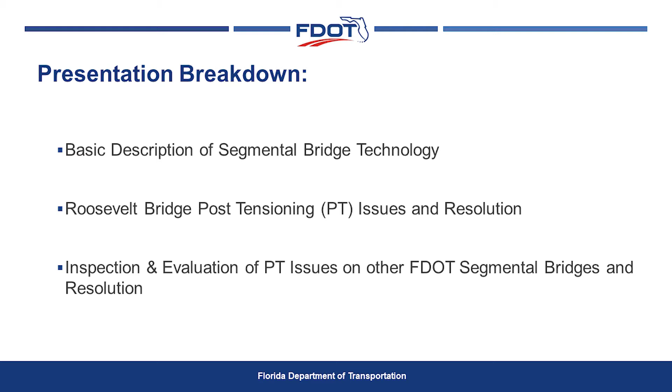This presentation is broken down into 3 parts. I'm going to give a basic description of segmental bridge technology, because I know some people here know what a segmental bridge is, but I want to focus in a little bit so we can understand better what we're dealing with. The second part is the Roosevelt Bridge case study, which kind of launched the last part, which is inspection and evaluation of PT issues on other segmental bridges and the resolution of those issues in Florida.

So there are basically 2 types of segmental bridges: span by span, which I'll touch on in a minute, and balanced cantilever construction, which we're going to be focusing on today. It is exactly what it sounds like - you hang a segment on one side of the pier, and you go on the other side, keeping the load balanced until you get to the closure pours. Then you close the closure pour, pour the concrete, and post-tension across the bottom of it.

Why this has been a popular erection technique is because it's self-supporting. The PT at the top is about 2.5 times what you need in the final condition. It has some advantages in terms of cost over span by span, which you'll see why when I get to that - just a brief touch on it.

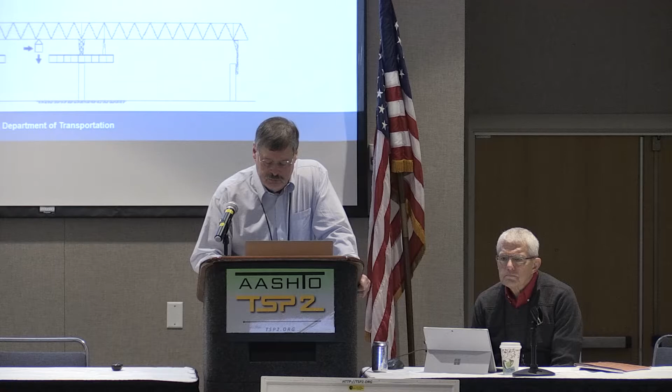So here is a typical balanced cantilever segment. They're cast in a casting yard, cast against the previously cast segment. The previously cast segment is rotated to adjust for horizontal geometry, vertical geometry, profile, deflection, anticipated deflection, shrinkage, creep - whatever else goes into that. Then it's moved up and they cast the next one.

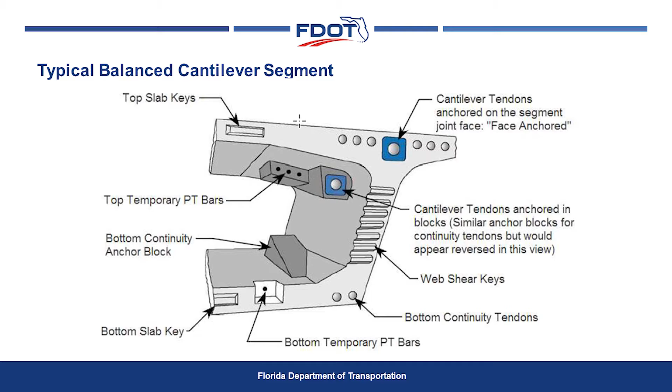What you see here is that for a balanced cantilever segmental bridge, they have internal tendons - internal to the concrete, and that's part of the issue we're going to be talking about. Also you notice the top temporary PT bars - that's called a blister. And on the bottom, they're showing bottom temporary PT bars embedded in the deck slab. It could be either deck slab. Typically blisters are used, and the only other thing of interest here is the anchorages, and that's a big interest.

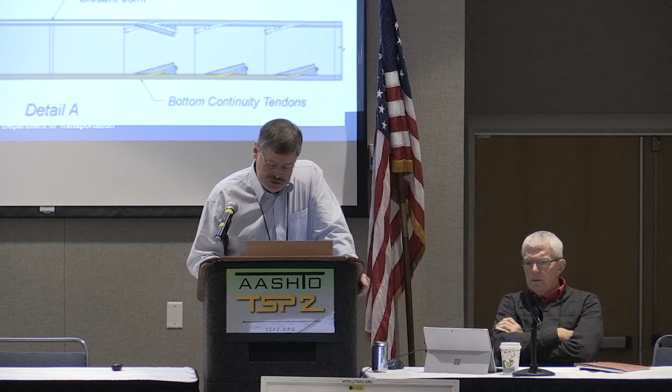I'm not going to dwell on this slide. It just shows that the way it's post-tensioned, it looks a lot like you'd have for reinforcing, if you were doing any other traditional, even smaller reinforced concrete bridge. It's the same thing - you got positive moment tendons, you got negative moment tendons. The positive moment tendons are actually called continuity tendons in this technology.

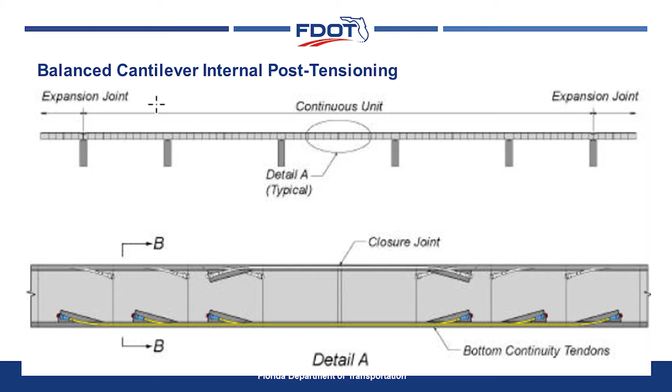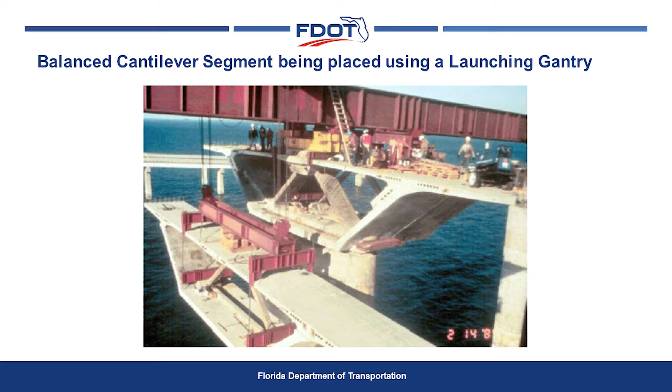This is a segment being placed using a launching gantry. This is very popular in Florida because a lot of it's done over water. You bring it out on a barge, you hoist it up, you put in your temporary PT, double face epoxy, you squeeze it, so theoretically you don't get any leakage - and it's not for the faint of heart. Believe me, I've been out there doing these operations, I've been on the stressing platform, and it has your attention, big time.

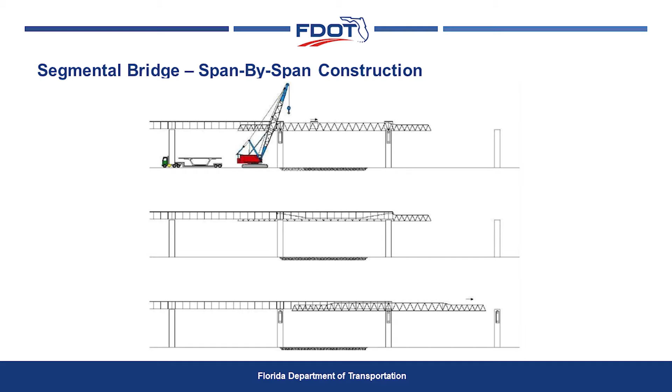Segmental span-by-span construction is similar, except it's used on a truss, and I think that's probably why it's a little less popular, because the costs are maybe a little bit higher. But sometimes there are good places to use these too. You have to have 2 spans erected so you can do the negative post-tensioning across the top, and we have quite a few of these in Florida. The big difference on the older bridges - well, first of all, they all have external tendons.

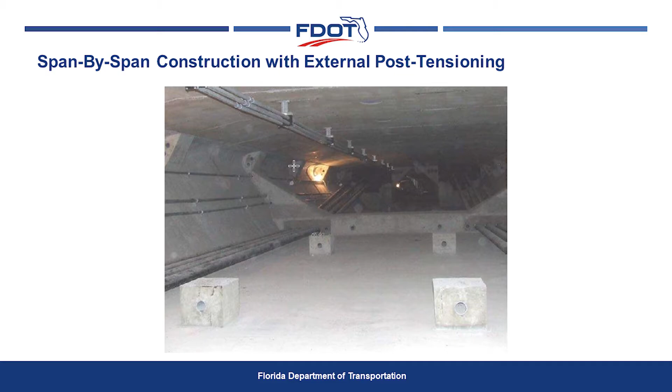They're inside the box, and you can see them down here in the bottom - those pipe-looking things, those are the tendons. And you can see up in the corner, at the top and the bottom, you have the blisters. Those blisters are there during erection so you can squeeze the double-face epoxy so you don't get leakage. In the end, they look pretty much the same. They have a little less post-tensioning in them, and remarkably, we've had less problems with these types of bridges, and we're going to talk about that a little bit more later.

So anyway, Roosevelt Bridge - when we looked at this bridge, it was 23 years old.

It's US 1 and State Road 5 in Stuart, Florida. It crosses over the St. Lucie River, over the Dixie Highway, and over the Florida East Coast Railroad. The bridge is basically twin bridges, 3 lanes each. It was in service 23 years before it started to develop problems.

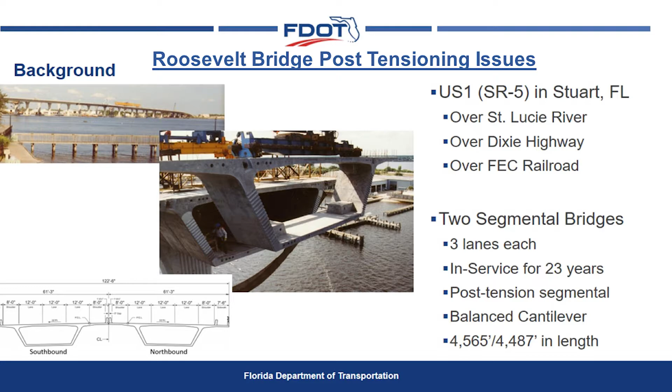I was out there during the initial construction, and I had some questions, which I guess was kind of prophetic, but we'll get into that too. It's a post-tension segmental balanced cantilever bridge, and they're both about a mile long.

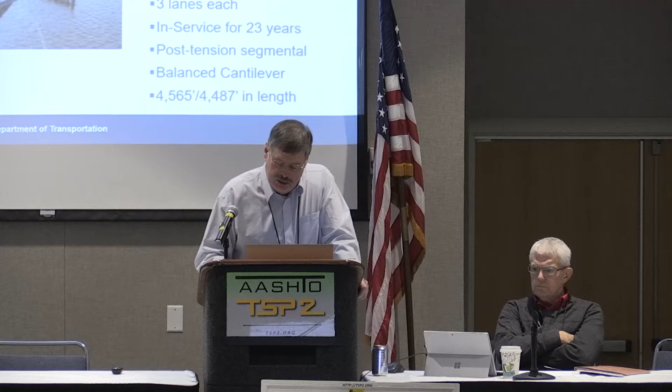On June 16, 2020, FDOT was informed that concrete had fallen off span 1 of the southbound Roosevelt Bridge. Inspectors observed this - it was called in by the public, so they sent inspectors out. They discovered a ruptured tendon and a large crack in span 1 southbound, and the span stability was a concern. I got a picture later on of this.

Immediate actions taken: the southbound bridge and Dixie Highway beneath span 1 southbound, northbound and southbound bridges were closed. Dixie Highway had a bridge going across, so you took out 4 lanes of traffic in either direction in one fell swoop, and that was the only access on the southern side of the island, so this was a big deal. Global detours were implemented.

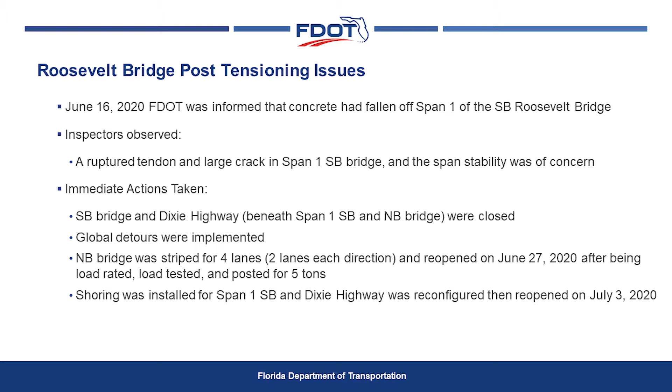The northbound bridge was striped for 4 lanes, 2 lanes in each direction. It was reopened on June 27, 2020, after being load rated, load tested, and posted for 5 tons.

I had a lot of conversations with John Corvin. He was the engineer on this, and he was kind of nervous about doing this load rating. He said, what are you looking for? And I said, I think we could live with 5 tons just to get the traffic on the thing. We had a lot of discussion about the load rating, how it should be done. And in the end, that's what we did.

Shoring was installed for span 1, and Dixie Highway was reconfigured and reopened on July 3rd, 2020.

So this is what we saw out in the field. On the left, what you see is a corroded tendon. It's basically necked down, so it's yielded. There's loss of section, there's lots of rust. This tendon has failed, you know what I mean?

And on the right is what you see is that crack. Now between that crack, in one direction heading off to the right, there was the end bent. So if this thing went, even though it was a continuous bridge, that span was going to fall down. And that's why the shoring was put in, to make sure that didn't happen.

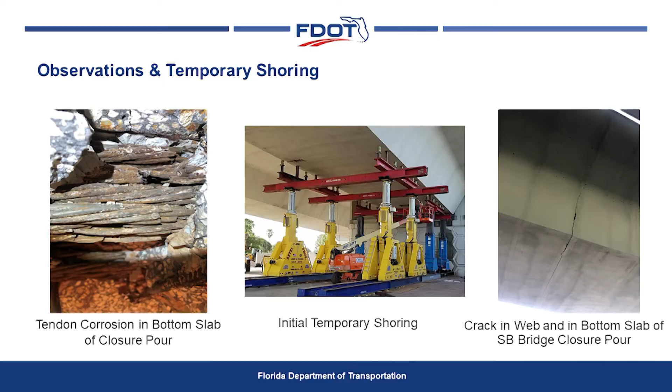Soundings were performed to determine the locations of delamination and crack locations - they were map cracked. We didn't know exactly how serious that was going to be, so they were mapping everything. Non-destructive testing was used - we're going to talk about that a little bit more. Concrete excavations were performed to determine the extent of deterioration. Observed corroded tendons on northbound and southbound bridges, and delaminated concrete was map cracked and located.

Concrete and grout samples were taken and tested for chlorides and sulfates. Usually we don't have a problem with sulfates unless we have thixotropic grout. We've had some problems in the past, but it was just one particular manufacturer, and we don't use that anymore. It's been pulled off the market, as a matter of fact.

And our issue here was chlorides, and there was a big study to try to figure out what was really going on. Well, we had cracked concrete on the deck, and we were very close to the ocean, so salt was collecting on the deck, washing through the cracks, and that was the real problem over here.

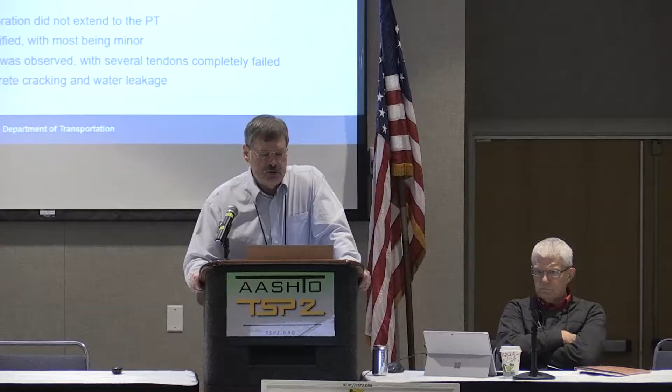Findings at most excavations: concrete deterioration did not extend to the PT. Various levels of corrosion were identified, with most being minor, which thank goodness for that. In span 1 southbound, extensive PT corrosion was observed, with several tendons completely failed. Deck slabs had extensive minor cracking and water leakage.

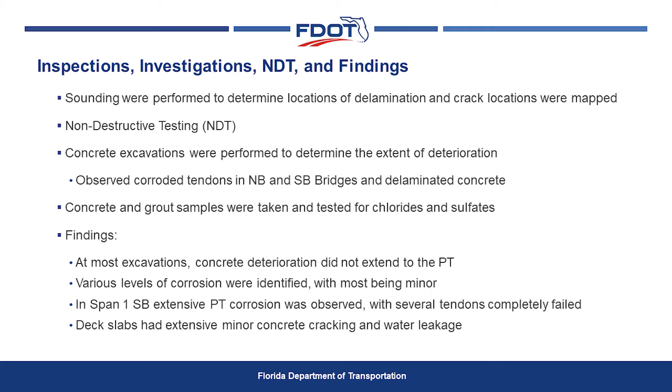And here is some of the NDT that was used. Initially, this was GPR, and they thought they could find some anomalies, but they had a problem with connectivity because they had to have an aerial, and it was in the box, and this is moving so fast, they didn't have an aerial system put together.

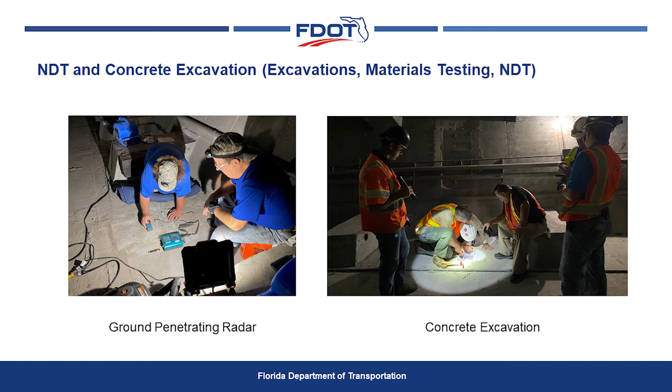But what it was used for effectively was locating tendons. So on the right over here, what they're doing is they're basically plotting out where the tendons are, and they're determining exactly where you're going to have to excavate.

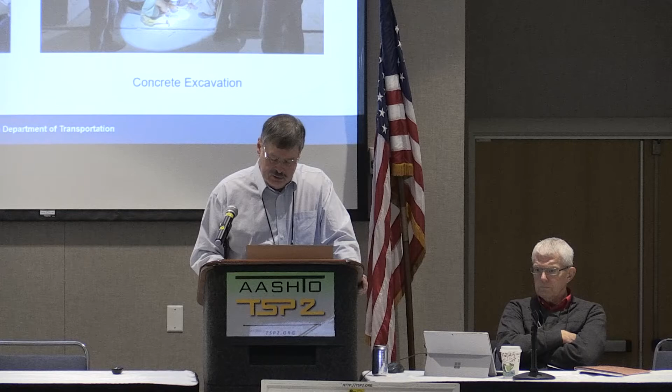An excavation of a tendon takes about 4 hours. It's like a root canal. It has to be done very carefully, because as soon as you nick the tendon, you really can't trust it. So you want to do this extremely carefully and find out what's going on, but it's a slow process.

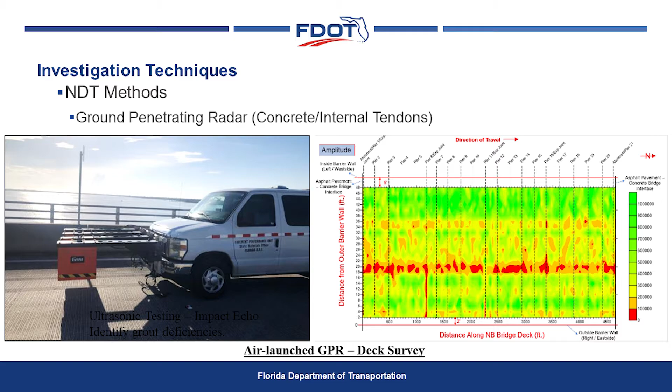This is another NDT we used. It was in-house air launch GPR, and the air launch is on the front of the FDOT van, you can see an FDOT van. It's run by the materials office. On the right over there, you see the plot, and green is good, red is bad, yellow is not so good, and light pink is a little worse than yellow. We also used thermal thermography, but we had to contract that out.

We found very similar results, although it didn't match up 100%. So we started getting into this, looking at what was happening with the deck, and we found that the red wasn't as bad as we thought, because they were really anomalies. It hadn't really gotten down to the post-tensioning and the steel to any great degree.

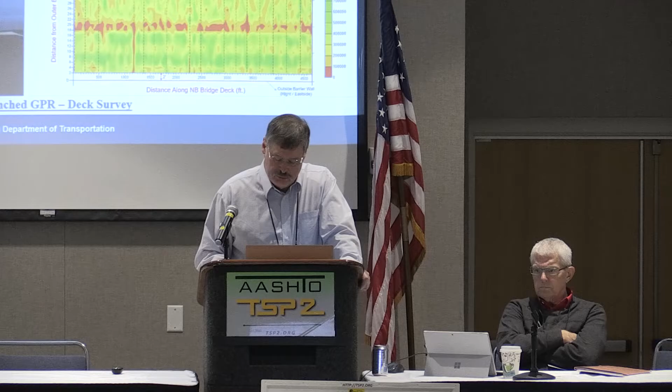So there wasn't a lot of damage to the post-tensioning system on the top post-tensioning. It was the bottom post-tensioning, the continuity tendons, that were the issue. Provisional tendons were added to both bridges, 9 spans northbound and 8 spans southbound. This is because we had some section loss, and we wanted to make sure they weren't compromising capacity. Plus the bridge has got ongoing corrosion. It's got cancer, you know - we're going to have to watch this bridge forever. I'll talk a little more about that in a minute.

What happened was we put in some additional provisional tendons. We used the existing blisters, and we just strengthened it a little bit, just to give us a little bit of buffer over here.

In span 1 southbound, the internal tendons were cut. New external PT tendons were installed with plastic ducts and flexible fill. I'll show that in a minute. Closure pour concrete and corroded tendons were removed, and concrete was restored. They had to do it because the tendons in the southbound span had a water leak going on forever, which had compromised the deck slab concrete, and we didn't want the rusting to destroy the bottom slab.

So even though there was no active post-tensioning in there, we had to get them out and restore the concrete. In order to stop water leakage in the decks, segment joints were sealed. An epoxy overlay was placed on the decks, approaches, and sidewalks, and I'm going to have a nice picture of that in a few minutes.

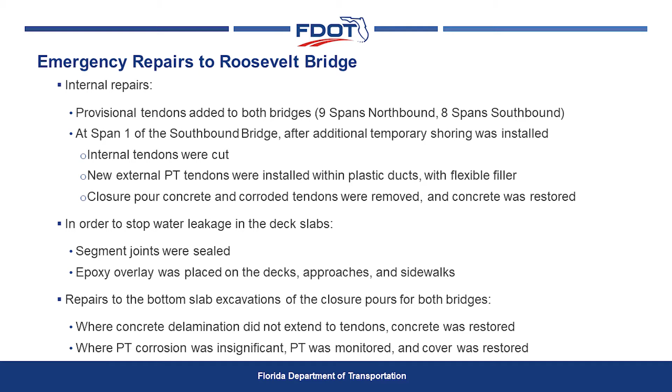More things are coming. Repairs to the bottom slab excavations at the closure pours for both bridges: where the concrete delamination did not extend to the tendons, concrete was restored. That was good stuff. Where corrosion was insignificant, PT was monitored and cover was restored. After they tried to passivate this as best they could, they wire brushed it and used vector corrosion paint on it, then restored the concrete.

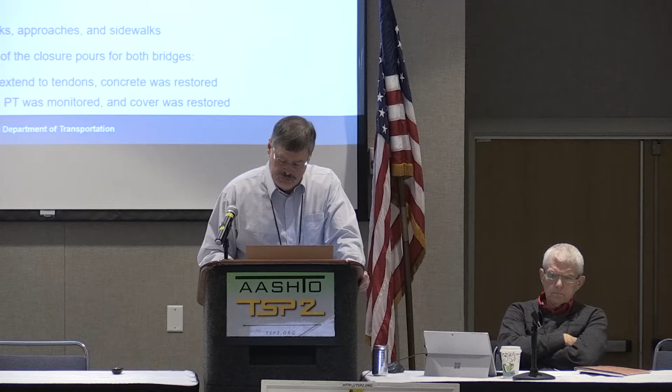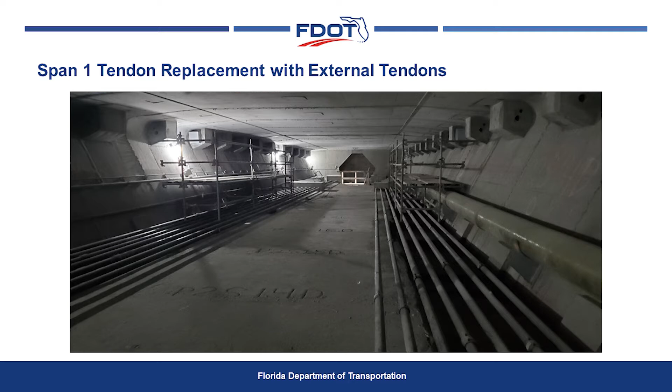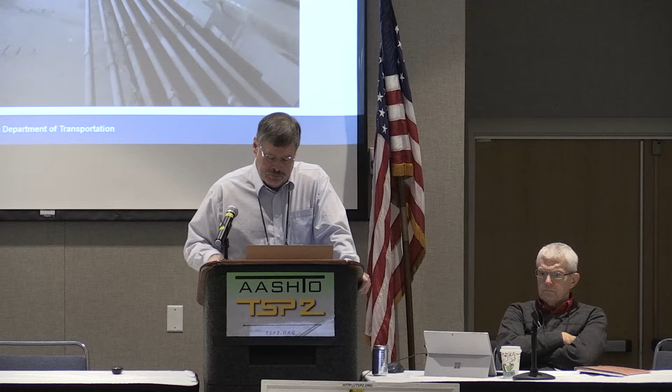So they wanted to make sure it was passivated. This is the inside of the box in span 1. You can see the ducts over there, the plastic ducts which contain the tendons, and also the flexible filler, which is basically wax. Just by doing this repair, because it was tendon for tendon replacement, it is not as strong a bridge as it was before. The reason is you're close to the neutral axis, and these ducts in these wax tendons cannot develop bond, so there's a reduction in capacity.

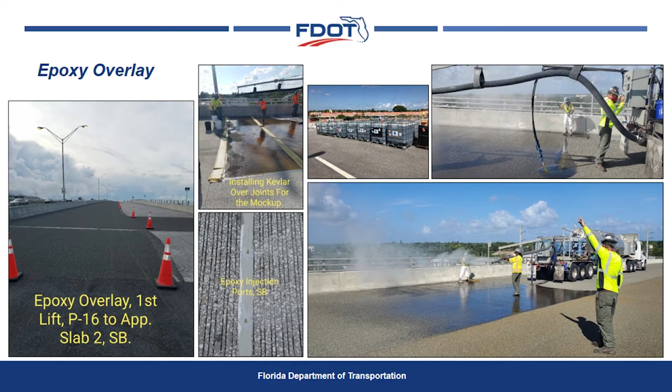We don't do this very often in Florida, by the way. But they had a segmental bridge they did this on years ago that didn't have any conditions like this, but had leakage. It's been out there 15 years and it's still not leaking. So this is where we decided to go, because we wanted to protect the PT in the top slab, and we definitely had to stop the leakage for the PT and tendons in the bottom slab.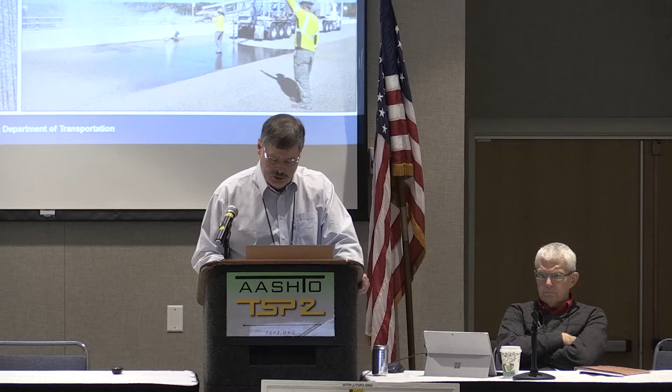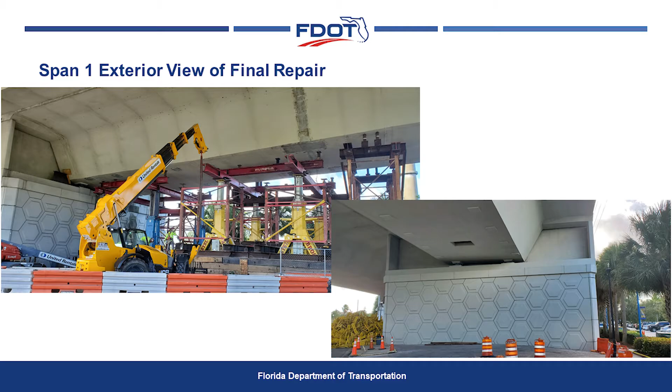And the bridge, that's the final repair, and that's what it looks like. The district secretary insisted on it being Class 5, wanted to give the public a lot of confidence, and the bridge looks like it's new, really.

Reopening the bridge: on November 5th, 2020, the southbound bridge was reopened to unrestricted traffic. On November 24th, 2020, the northbound and southbound bridges were opened to 3 lanes each. Conclusion and status.

Roosevelt Bridge has been restored and is open to legal truckloads. I made the decision that even though I had some reserve capacity because it had a rating factor of 1.3, I didn't want to see heavy loads on this bridge. So I have the control to restrict all overweight loads, and nobody challenged me on it.

We had Old Dixie Highway underneath that could carry truckloads, and the other side of the island could carry truckloads. So it's a minor inconvenience to the trucking industry, but we want to protect this bridge because we don't know exactly what's happening with it long term.

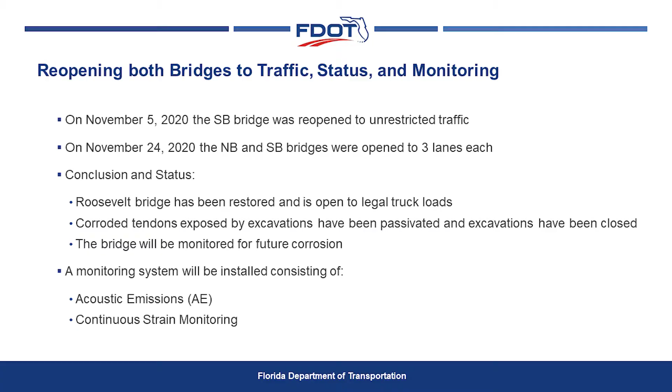So we decided to install a monitoring system, the first health monitoring system we've done in Florida, except we did a demonstration project years ago on a steel bridge we were trying to find out more about. Actually, the legislature mandated that we do it. It consists of acoustic emissions, which can listen for sound. It listens for strand breakage, and you can home in approximately where it is, but we're also using continuous strain monitoring to see how the bridge behaves over time.

It's like anything else. This is like a human going through remission with cancer. So we want to keep track of this thing, and hopefully we can get to it before it continues. I don't think anybody believes we're going to get more than a 50-year service life on this bridge. We're going to try to keep it going as long as we can.

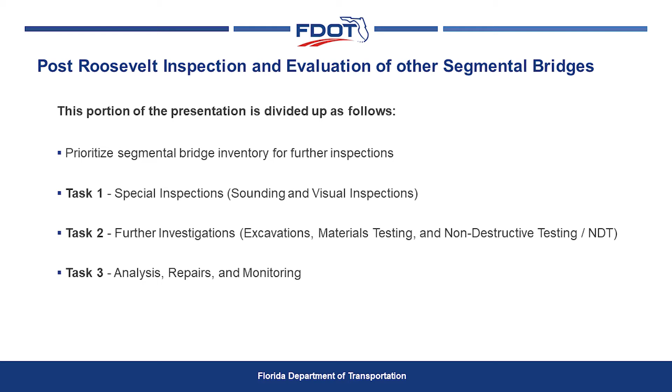What happened with Roosevelt Bridge opened our eyes, and senior management started asking, what's happening with the rest of our bridges? So we decided to look at the rest of our segmental bridges and prioritize the bridge inventory for further inspections. Task 1 was the same type of thing we did before: special inspections, soundings, and visual inspections. Task 2 was further inspections, investigations, excavations, material testing, and non-destructive testing, which I wish we would have used more of, and analysis, repairs, and monitoring if necessary.

So if you look at this, this is how we went about prioritizing our bridges. We had 92 segmental bridges in the state, 56 miles of roadway, and we had 66 bridges, 23 miles of roadway, that were identified for further inspection. Why? Because they had internal metal ducts.

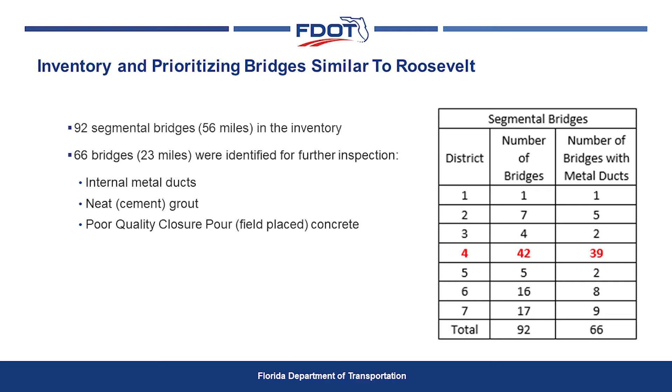We don't use internal metal ducts anymore, and we stopped doing that a number of years ago. But internal metal ducts are not good for one reason. When I was out there on Roosevelt Bridge, I saw what they were doing - they were using duct tape to put the internal metal ducts together. It was a standard of the time.

And the thought was that the grout's going to fill everything. Well, yeah, it's not pressure tested, so you don't necessarily get the grout filling everything, and plus it's got corrugation, so you get trapped air and water. The other thing at that time was they used neat grout, which is either a cement or sand cement grout, and that can subside, and it has subsided at high locations, and that can cause problems trapping air and water. We also had poor quality closure pour.

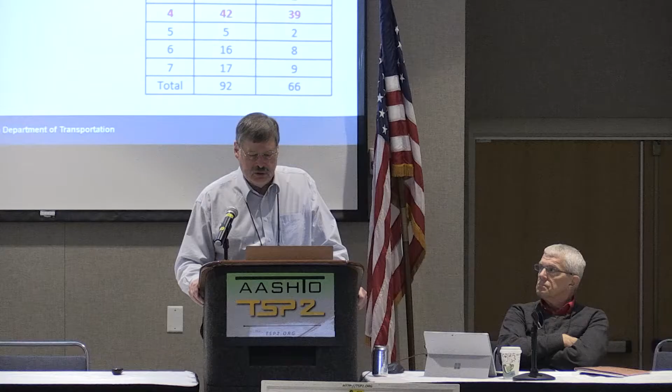So if you take a look at this, we had a district secretary who was very avant-garde and wanted to see a lot of nice, cool-looking bridges in his district. District 4 had the lion's share. The numbers speak for themselves.

What did we do? We did pretty much the same thing we did on Roosevelt Bridge. We started soundings with a hammer, performed on the interior and exterior of the box girders, listening for delaminations. Emphasis was given to soundings at closure pours to locate delaminations. Locations of concrete spalling were identified. Significant cracking was mapped, and special attention was paid near tendons.

Of course, we saw conditions that extended into the segments. We would follow up on that. This is a real challenge, particularly in South Florida. There's a lot of traffic in South Florida, and scheduling over the interstate is an issue.

It has to be done at night. You have to use the public information office. They have to notify the public, and then you get out there. There's traffic control that has to be shifted around, done with lights and everything else. And it takes a long time to do this, and you can't close everything at once. So this took a long time to do.

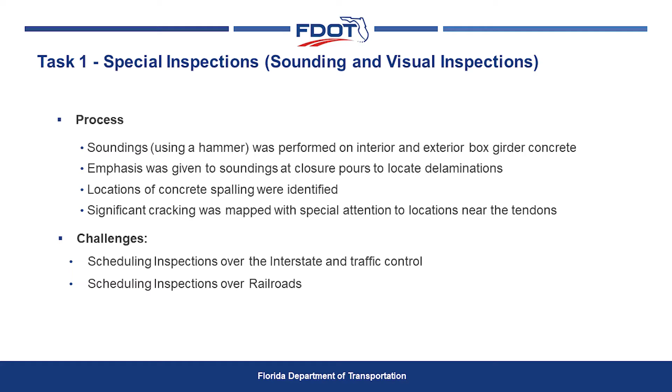And of course, scheduling inspections over the railroads. We had 4 spans. It took almost as long to schedule that as the inspections on the other bridges. The railroad - it's a busy rail line down there, and it was tough.

Status and findings: 100% of the special inspections are complete. 66 bridges targeted for additional inspections because they had metal ducts and neat grout. Districts chose to do a few more.

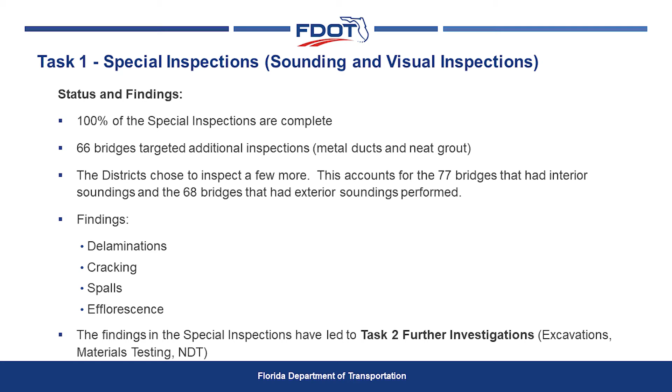This accounts for 77 bridges that had interior soundings and 68 bridges that had exterior soundings performed. So what were the findings? We've had delaminations, cracking, spalls, and efflorescence, something new. And that led us to further investigations.

Further investigations - any significant findings discovered during the special inspection? We thought the investigations consisted of following up the special inspection findings, the areas of delaminated concrete, and of course again we did material testing. We took cores of the grout, cores of the concrete, looking for chloride and sulfates.

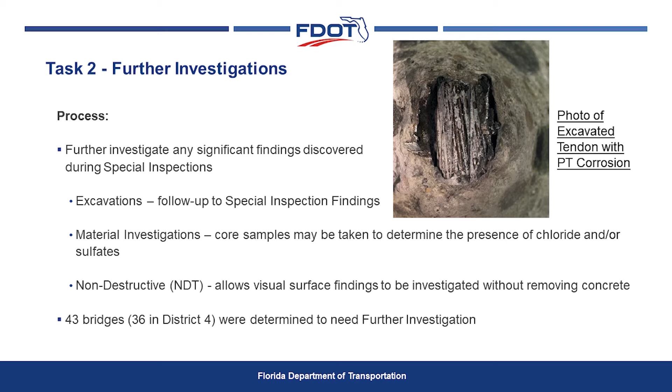And all we found was chlorides, no surprise. Non-destructive testing allows visual surface findings to be investigated without removing concrete. We tried a whole bunch of different NDT, but in the end we moved on with excavations because it was just faster and we were covering a lot of ground. Visual inspections and soundings, believe it or not, are NDT.

We tried ground penetrating radar, which you saw, which we used effectively. We tried impact echo, which gives better results, but it was too slow and hard to schedule, so we just kept on moving. Air-launched GPR was the one you saw.

Of course we did thermal thermography, and we tried magnetic main flux, which is used on external tendons, but had never been tried on internal tendons before. It was something developed in Germany that FIU's Dr. Atorod Azizinamini has been working on, and he had a prototype, but it weighed 200 pounds.

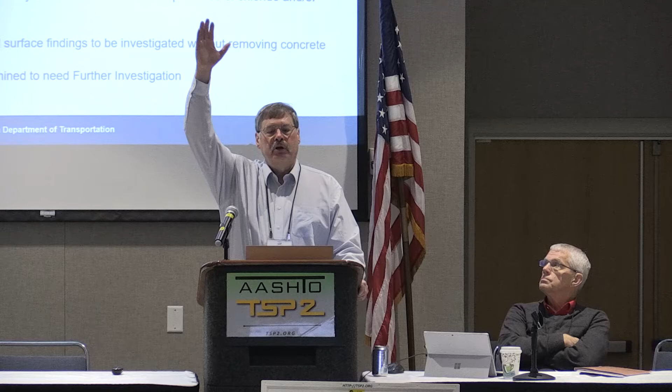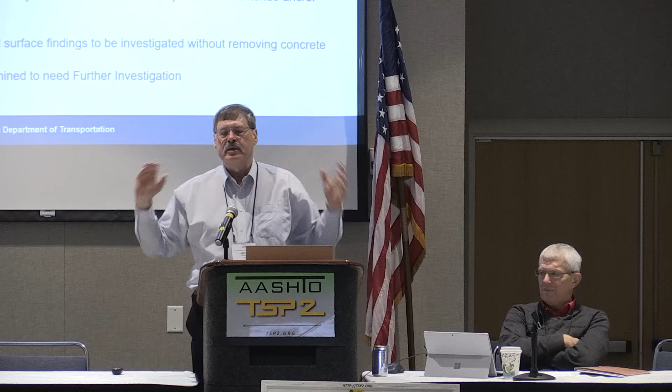So if you're on a snooper under the bridge and you want to measure it, you had to hold up this 200-pound device over your head. It was impractical. Did it work? Yes. They got to come up with a more user-friendly model, but the technology is heading in the right direction, which is a good thing.

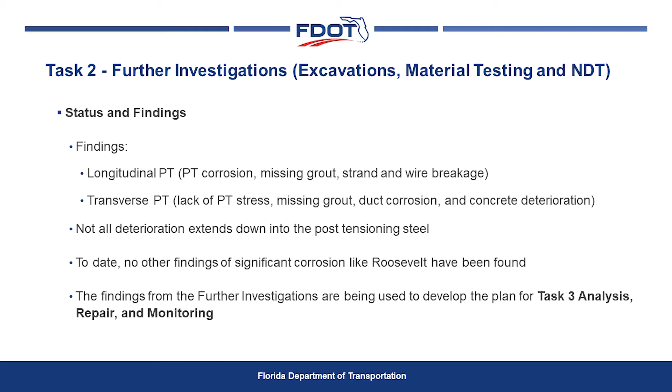Findings - longitudinal, this is where we found some of the more interesting things. Longitudinal PT: we had PT corrosion, missing grout, strand and wire breakage. Transverse PT: lack of PT stress, missing grout, duct corrosion, and concrete deterioration, even missing tendons in some locations. Not all deterioration extends into the post-tensioning steel. That was good.

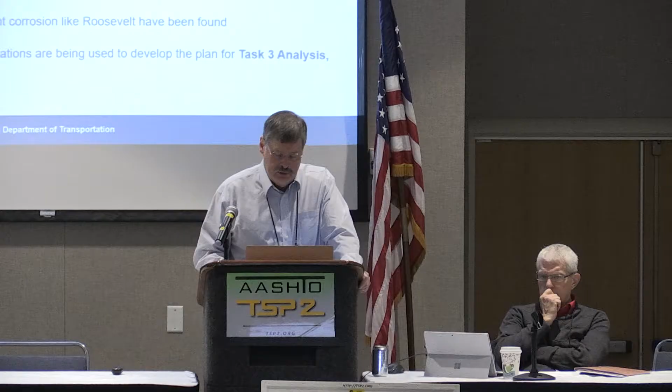To date, no other findings of significance like Roosevelt Bridge have been found, and we're not going to have to do any monitoring because there's nothing that bad out there - I'll explain why. District 4, to try to get a handle on this and move forward as fast as possible, decided to prioritize their excavations. Where they found deficiencies like slack tendons, that was first priority - 9 bridges had that.

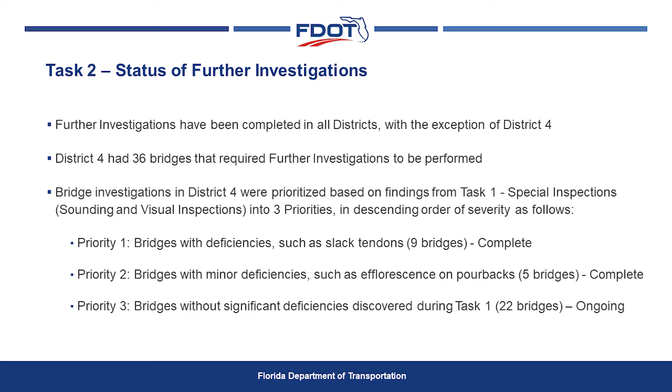For priority 2, they targeted bridges with minor deficiencies such as efflorescence on pourbacks - 5 bridges like that. And in their infinite wisdom, we let them do whatever they want out there, they want to look at 22 other bridges, spot check to see if it's really working and there's no issues out there. That's still ongoing, should be done this December.

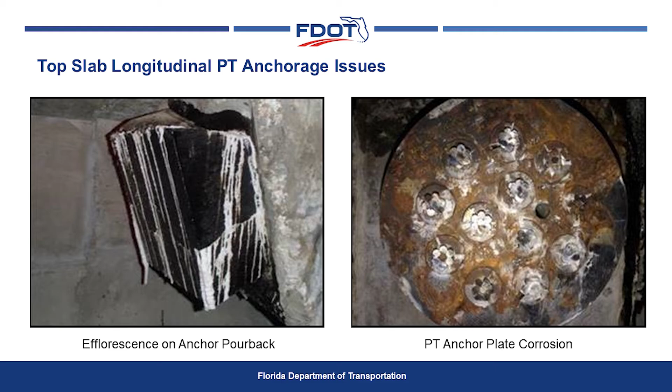So we removed the concrete, and on the right this is what we saw - some rusting, and you can see the strands sticking through. You can even see the wedges if you look close enough. It doesn't look good, but there's no loss of section. So what are we going to do? We're going to wire brush this up, put the vector corrosion inhibitor paint on it, put high-quality concrete and the mastic on, and go home on this issue.

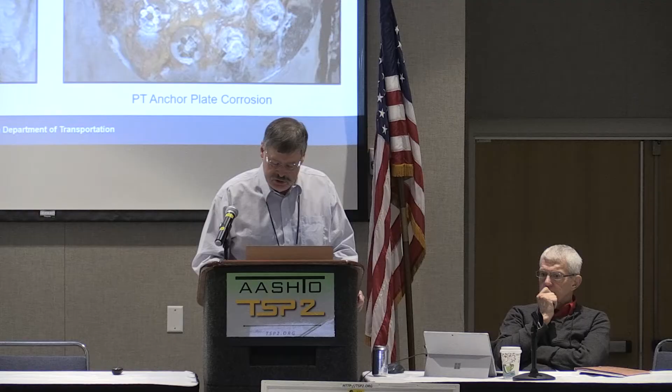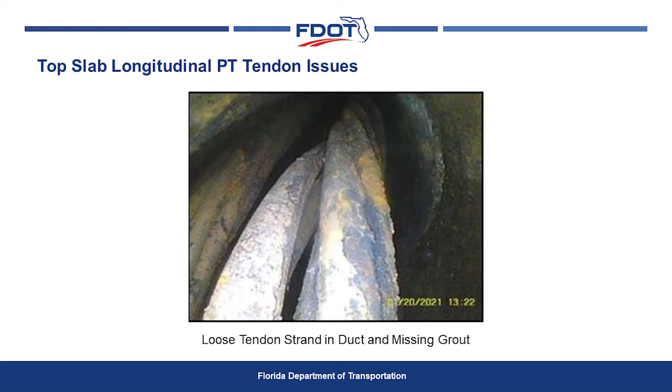We had the top slab PT tendons - these are some slack tendons, there's no grout out there either. It's like, this is not good. The good news is this was the top slab - these were all found on the top slab PT tendons, where you have about 2.5 times more than you need. Of course we validated by a load rating, but it does not affect the capacity of the bridge.

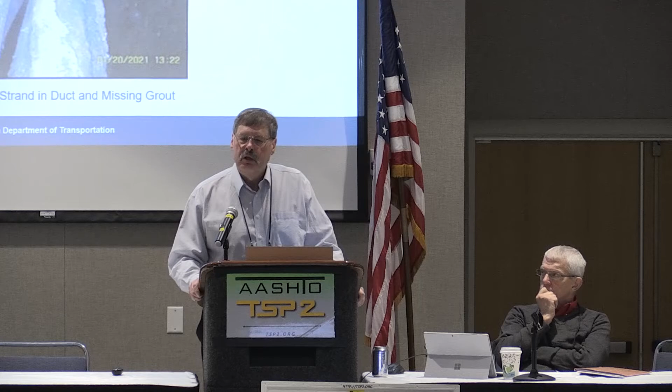So what do you do? You grout this up, you close it up, and you just thank the fact that you're more lucky than good, and you move on.

Now we started chipping this out, and what did we find? We found tendons that had no grout, tendons where the anchorages were missing, some tendon locations where there were no tendons. And we're looking at this and saying, what the heck's going on here?

And then we noticed that there was no cracking in the roadway on the inside of the barrier wall, on the top or the bottom. So somehow that stress is being transferred.

So there's a guy that works for me, his name is Tom Beidelman. He's our state bridge evaluation engineer, runs the permit program. He's a very good modeler. And I explained to Tom what I thought was going on.

I said, I think we're getting transfer of stresses to the longitudinal tendons through the mild reinforcement of the closure pour, and it's going to the segments. He said, I don't buy into that. I said, well, I want you to prove me wrong, because this is your next assignment.

And he tried his best to prove me wrong. What he did was he took a look at various different locations — this is part of his finite element modeling. He looked at 1,100 to 1,200 different cases of moving loads around, different closure pour widths, different overhang lengths, different distances between webs, and in the end he found a 3% increase.

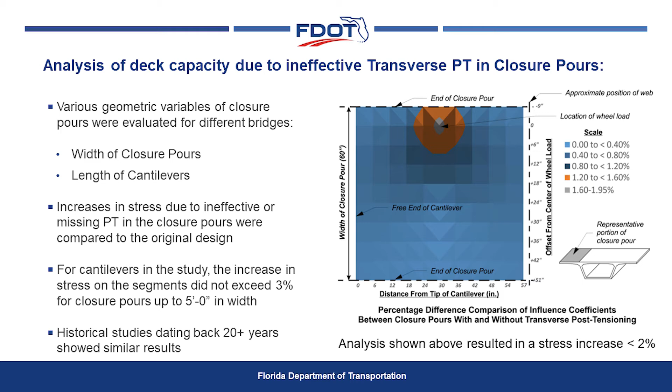3% is nothing, we're not going to worry about that, right? But he didn't believe it. He's diligent, he's trying to prove me wrong. He wants to make me look like an idiot, but that's what I wanted him to do. Go for it.

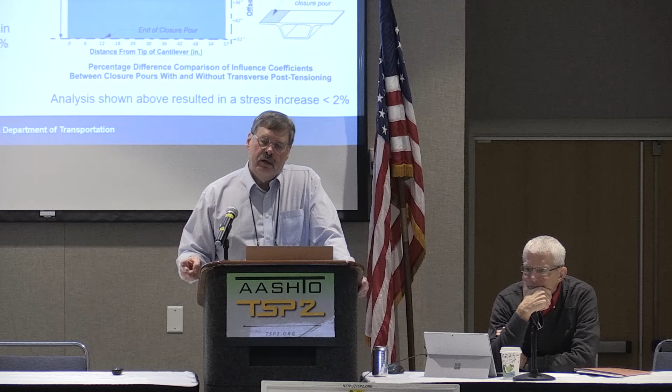And he did this, took a look at some historical studies dating back 20 years. There were two reports out there that found the same results.

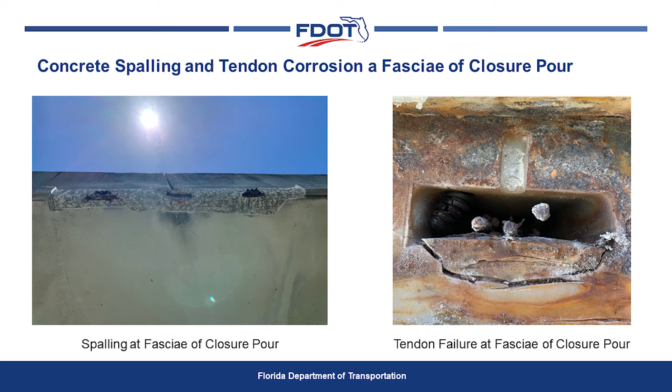This is another instance where it's better to be lucky than good. So, sometimes we get lucky, and we got lucky on these issues.

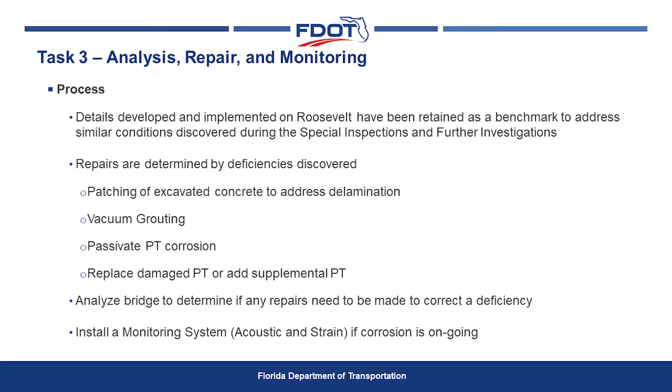Details developed and implemented on Roosevelt Bridge have been retained as a benchmark to address similar conditions discovered during special inspections and further investigations, as is what we discovered on these other bridges, which we just looked at. Repairs are determined by deficiencies discovered: patching of excavated concrete to address delamination, vacuum grouting, passivate PT corrosion, replace damaged or supplemental PT. We didn't have to do that with any bridge but Roosevelt.

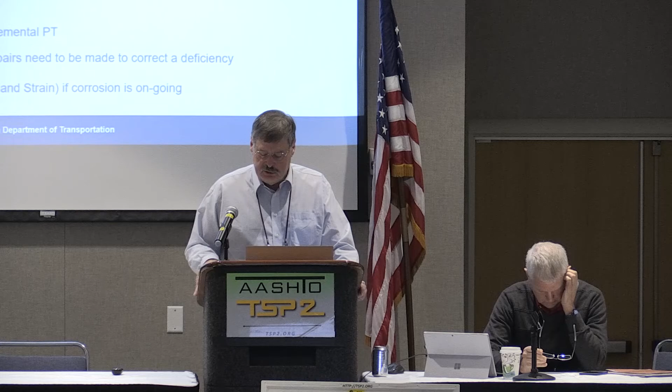Analyze bridge to determine if any repairs need to be made to correct the deficiency, and I just described what we did there. And install a monitoring system, which we believe acoustic and strain works best, but we haven't had to do that in these other bridges. And even though we're not done, we know we're not going to have to do it.

We didn't know this was going on, so what are we going to do? We're going to change what we do in inspection, right? We're writing this into the inspection procedures. And what are we going to do? We're going to inspect the top and the bottom of the closure pours for cracking.

And then we're going to sound the bottom of the closure pours for delamination. And if the webs have internal tendons, we're going to do the same thing with them. And when delaminations are in the vicinity of the PT, we're going to remove the deteriorated concrete to the top of the PT if necessary. And if deterioration does not extend to the PT, we're going to restore the concrete.

If the duct or PT corrosion is observed, we're going to document the conditions and pry the strands to identify movement — if you have movement, you know you've lost some PT stress. And we're going to test the concrete for the presence of chlorides and sulfates.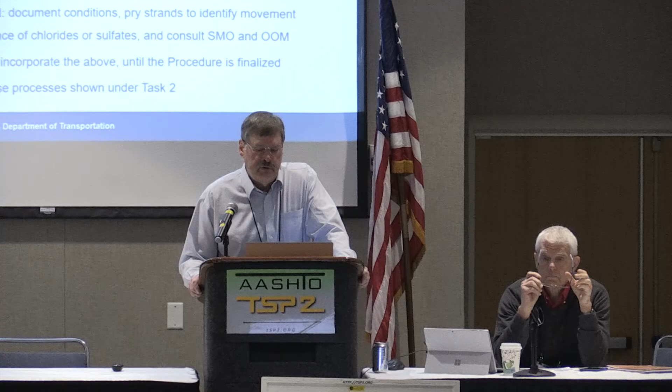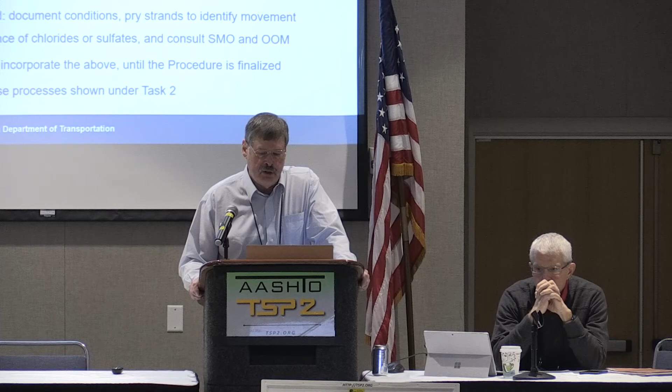And if they get to this point, we expect the districts to contact two groups, the State Materials Office and us, because we want to be part of this whole guidance issue so that everything's handled appropriately. Because it takes us two years to get a procedure updated due to all the legal reviews we have to go through now, which is kind of ridiculous in a way, we published a memorandum immediately to make sure everybody's doing this on future PT bridge inspections. Further investigations are needed, and we're going to follow the game plan developed herein.

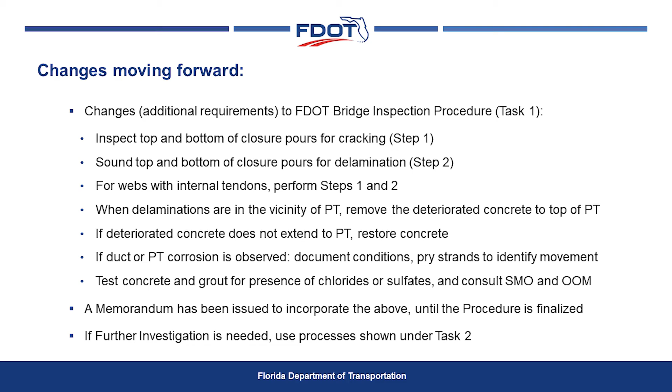People are saying, are we having the same problem on our newer bridges? We're not, because this is our third round of problems with segmental bridges. The first was in the late 90s, the other was the early 2000s, and this is the last one. What we've done over the years is improve the PT protection systems on newer bridges starting in 2001 and continuing: improved specifications, improved details, improved construction procedures, ducts, that's where the plastic ducts that can be pressurized come in, and improved grout.

We moved away from neat grout to thixotropic grout, and we've recently gone to replaceable tendons with flexible filler, which is a wax-type material. But you can't use that everywhere.

So we are still going to have more grouted tendons than replaceable tendons with flexible filler, and the reason is that on the top slab you don't want a duct with flexible filler in it because it won't support wheel loads and could cause problems with the deck. But anywhere we can, we're going to use flexible filler, and this is what they're doing in France.

I don't know how he swung it, but the state structures design engineer and one of his assistants got a nice trip to France to see what they do there, since this technology was developed in France. They never sent me to France or anywhere else outside the country.

Construction also improved construction practices and operations implemented on newer bridges. The most important thing is training for contractors and inspectors, on PT stressing, PT grouting, and flexible filler operations.

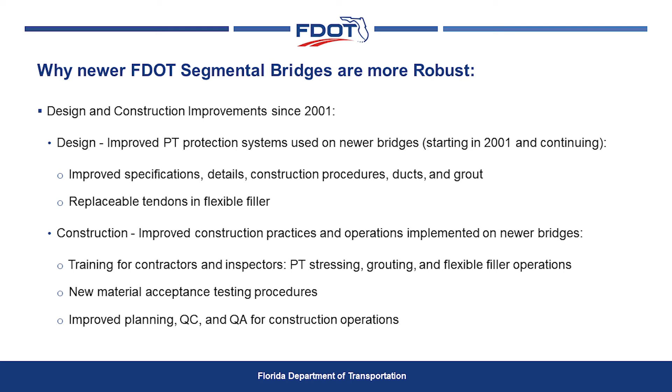The Materials Office also came up with new material acceptance procedures, and there's been a lot of changes in construction that occurred when I was in that office, around this time: improved planning, and quality control and quality assurance for construction operations.

When I say improved planning, it goes beyond segmental bridges. You sit down with your contractor when you have a major operation coming up and ask, what can go wrong and what's your workaround? Like, what happens if you lose your pump? Make sure you have a plan, try to think of everything, and the contractors love it. They absolutely love it because we're helping them do a good job and we're getting a better product for it.

That's it. Are there any questions? Just curious if you guys found any standing water inside the boxes.

Yes, and that's the reason they left them open. I kind of glossed through that, but they were sitting in the tendons, and they had salt in them and stuff like that. So the idea is, and of course everybody wants to move forward, but the Materials Office insisted that until we know where the water is coming from, we can't deal with this.

So that was where we went with that: the Kevlar, the methacrylate, the injection grouting, and the two layers of epoxy to stop it. It has stopped it. And when it dried up, that's when we closed them up and made the repairs.